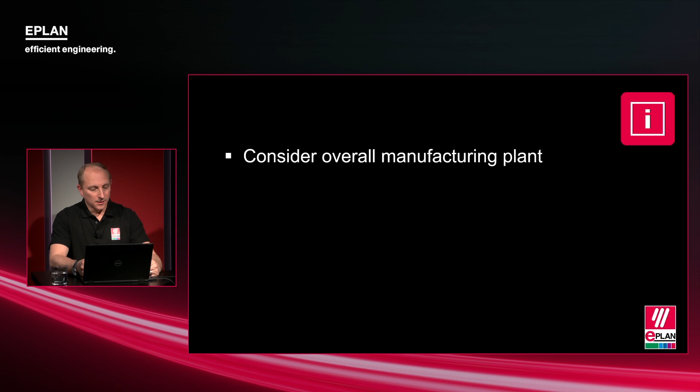So for them, standardization is about simplifying communication and collaboration with their subcontractors. This is really a key element for them to assure that all machines and systems they are investing in utilize the same type of technology, for example. This simplifies things for every field service engineer managing the same type of HMIs or PLC systems in their plant.

If you have completely different systems for every machine, that would be an enormous challenge for the field service engineers to manage. Think about a failure on one part of the line using a specific PLC system, and in the next hour you are jumping to the beginning of the line, and this part has a completely different PLC system. This creates a lot of challenges for them. So to harmonize and simplify this is really a key element.

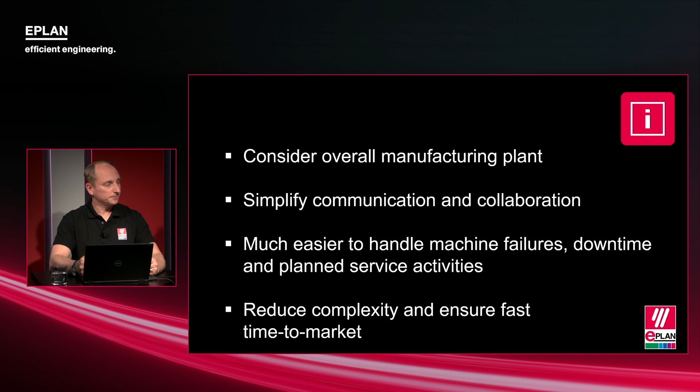And to have field service engineers that know all the systems really requires a lot of training. For a new engineer coming into that plant, it would also take an enormous time to onboard. So at the end of the day, from the operator perspective, it's about reducing the complexity within the plant to maintain and handle their systems altogether.

On the other side, from the subcontractor's point of view, they have a slightly different view, because they are producing a machine, for example, in a line which they are not going to maintain for the next 10 or 20 years. So for them it's about efficiency, utilizing standardization to ensure that they are able to reuse their engineering from machine to machine or plant to plant.

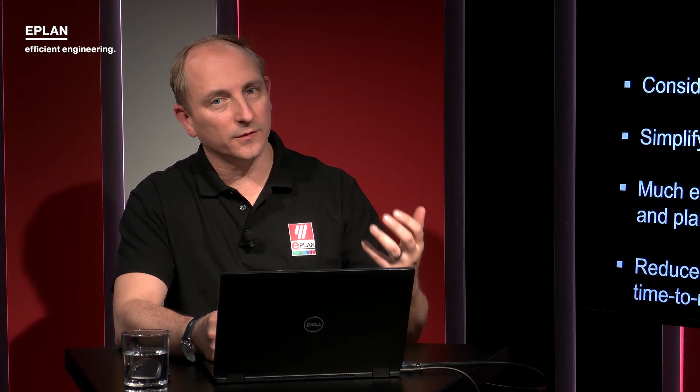This also ensures that they are competitive in the market, and as they may have multiple engineers in their firm, that they ensure the same quality in every project, regardless of who is involved. That is what standardization does for them, as two examples. Okay.

When we have a look at this list of benefits, that sounds quite reasonable, yeah? So there is a lot of added value in standardization: it makes things easier, simplifies communication, collaboration, etc. So that is quite obvious from the operator point of view, or as you mentioned, also from engineering departments.

But the experience was made that when we talk to customers, at customer meetings on fairs and customer events, and also not only customers but prospects, when you make the first steps with EPLAN and we address this topic of standardization, the first initial feedback is always: that's not possible for us because we have individual solutions for our customers, we have variants in our machines, we have modules, options, and every machine is quite special, is individual. So, is this true?

And that's of course true, Thomas. I also experienced the same meeting companies in most countries actually. They think very commonly from, let's say, a mechanical perspective. And from a mechanical perspective, yes, the machine or plant or line, whatever they are manufacturing, might be physically quite different, so to speak.

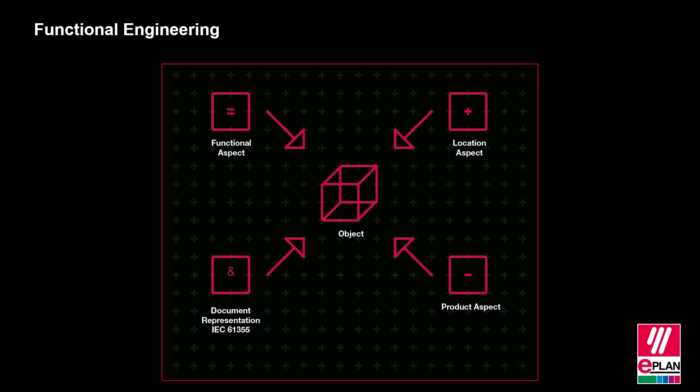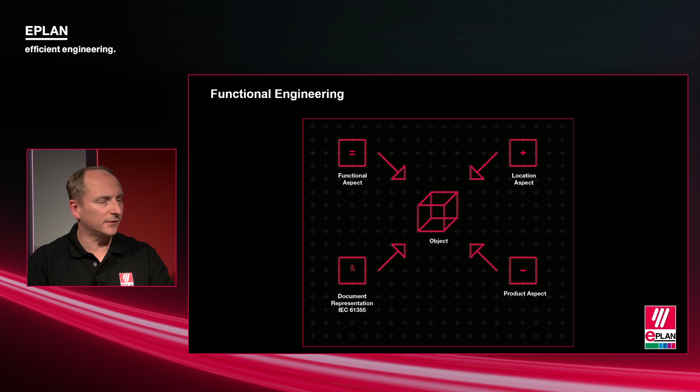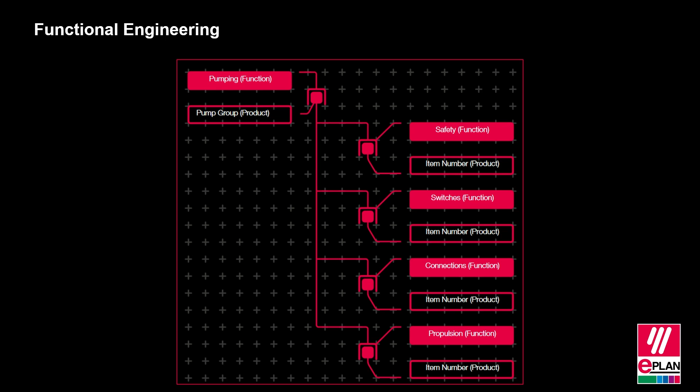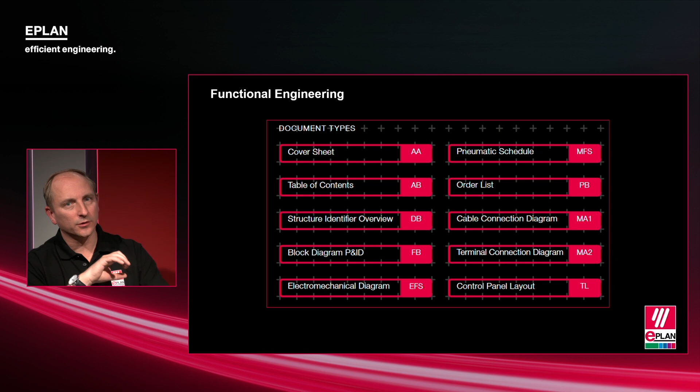Let me show you another aspect important when talking about documentation and reusability. What's important about the naming convention is also cross-trade, because when you think about a project, you need not only electrical controls design, but also pneumatic design, for example, controlling certain cylinders based on air. Based on that documentation, you need to think about the cross-trade within the same project.

Traditionally, in old standards, this was not really considered, because it was not necessarily supported by the engineering systems available. However, with IEC 81346, we think about all the cross-trades that you need to have and document within the same system.

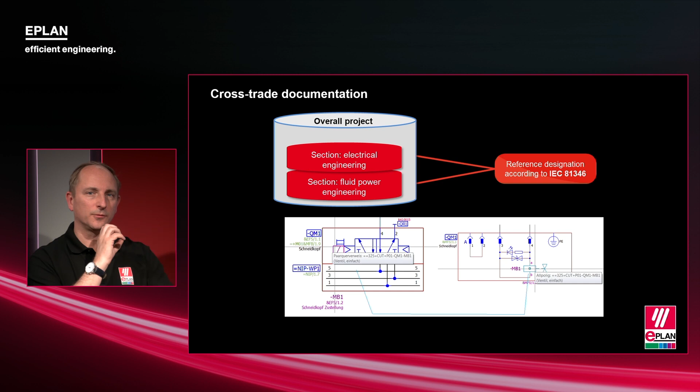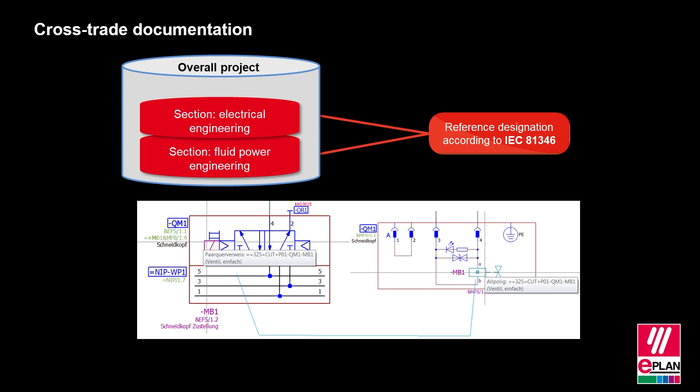Based on the Eplan platform, we have multiple different engineering disciplines we utilize. Taking the example of fluid design using Eplan Fluid, and electrical controls design using Eplan Electric P8, here's an idea of how the project encapsulates both engineering standards using IEC 81346 to also have the same naming convention. This is getting more and more important, and that's one additional reason why more engineers and companies are changing from the traditional production-oriented documentation to a more functional-oriented documentation.

Maybe just to give you a little insight into the software, so you can get a feeling of how it looks inside the Eplan platform. Let's switch over to the Eplan platform and have a look.

On the left side, you can see one of the industry samples provided from Eplan. We see the project, and here we see the first structure. This is the IEC 61355, which, as I mentioned, is related to the documentation structures. Here, for example, I can very easily find the documentation related to electrical controls design. This was the EFS, for example.

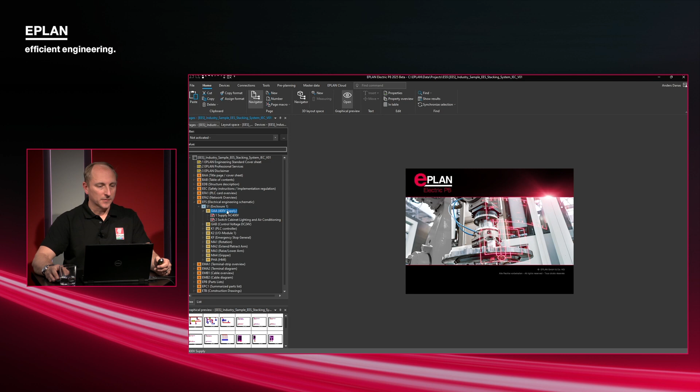Based on the structure below, we can see the plus, which was the location. In this case, this is located for enclosure 1. We also see the function, related to a 400-volt supply. Based on this, I can open the page and directly find all related components related to that power supply. So this is a simple way of seeing how you're replicating both the IEC 61355 for documentation structuring, and the functional aspect of the documentation related to IEC 81346.

So you introduced these, from my point of view, or maybe in the market, and you said customers are more and more switching to these new standards that support this idea of functional engineering. But when we look back, there is a traditional way to create documentation, and there is a reason why. So is this argumentation for production-oriented documentation still valid?

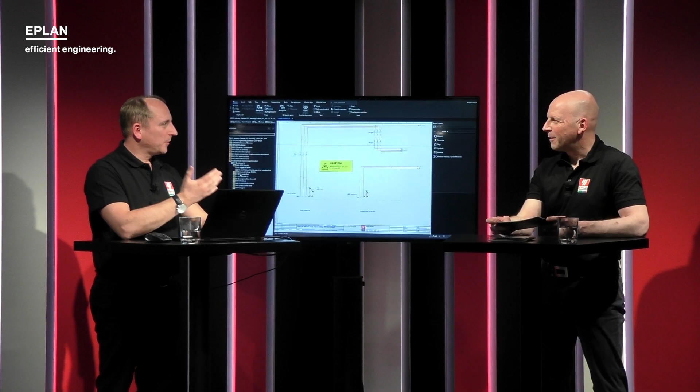It's an interesting aspect, Thomas, because we are faced with this question time and time again. Of course the legacy aspect is always an important factor, but the legacy is also built on systems that did not really support functional design.

Just to take an example, in a typical hardware design or production design aspect, you had to go through a lot of different papers to find the same information related to a function. On the other side, today when you do it in functional design, this is not necessary at all.

Because in Eplan, you have the ability to create all the data you need to collect all the information for manufacturing. If that is related to wiring or any other aspects in the panel, this can be collected out of all the functions.

That means the engineers can now support both the requirement on the manufacturing floor as well as the end customer, the operator, who requires documentation that is much easier to rely on when it comes to repairs and maintenance.

So that is somehow a change in the view of this electrical documentation, to have all the information in that functional structure in the schematics, and then derive it to prepare it for the target group. So to extract a wiring list, to extract a bill of material, and have all these different views, but one source for this information, and this source is easy to engineer, so to say.

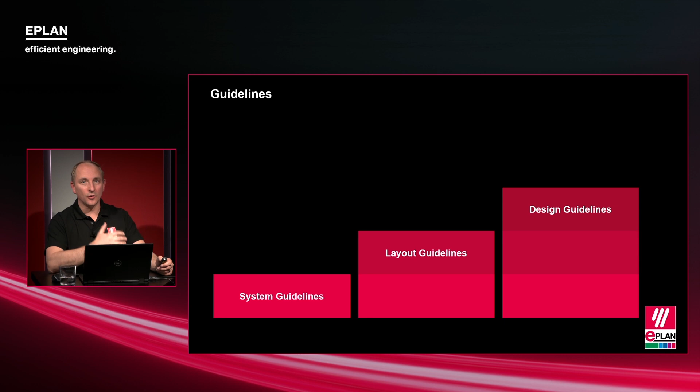As I mentioned earlier, when you think about the operator, they want to be able to store spare parts in their facility. Instead of storing parts from all manufacturers available on earth, they want to structure and standardize to certain brands or specific systems that are well known by the field engineers.

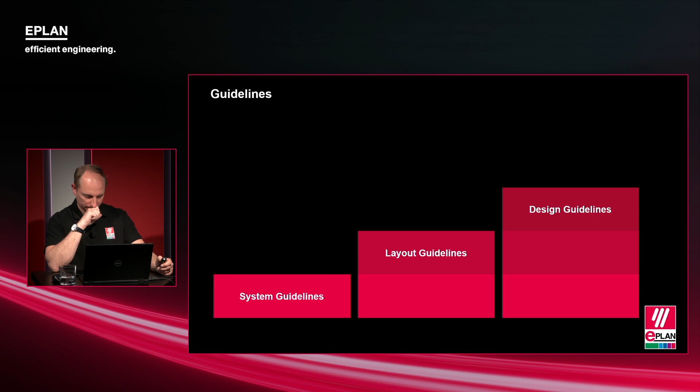So this is normally where we talk about these 3 levels of guidelines that operators work with towards their subcontractors. A takeaway here is that the idea behind it is scalable, so the first steps are maybe basic, but they can already have an effect.

Just thinking about system guidelines, to standardize on a system so that you get documentation based on Eplan, for example. You have these Eplan files coming from all the different sub-suppliers. That already has a great effect.

And then, of course, the operator can develop and go more and more into detail, getting more holistic definitions of how the engineering has to be done.

I think it's also a good idea to really get into collaboration and work together with these sub-suppliers. Even from the machine builder or supplier point of view, it could be interesting to address these ideas towards their order party, to think about how we can synchronize and have a common understanding, rather than finding out too late that they did not follow a standard in that project.

Yeah, so that I think has added value for both parties. And what I took away is that it's important to share the guidelines, standards, data, and so forth.

So now let's go more to the feature level or function level. What are the offerings from our portfolio to support this collaboration and sharing of data?

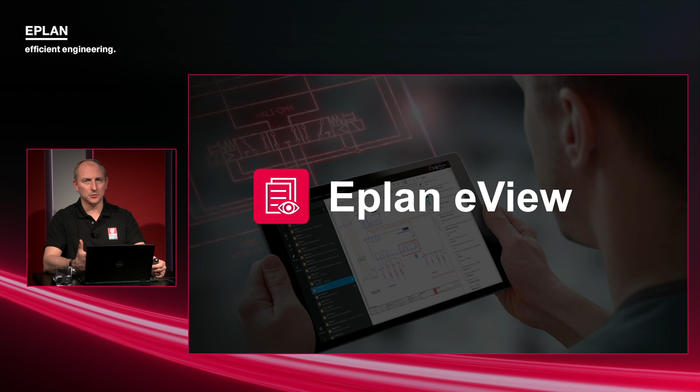The Eplan eView is the perfect tool to go in, have a look into the documentation, and also handle redlining. So where they identify mistakes in the documentation, they can redline it, mark it up, and communicate back to the engineering itself.

Another aspect, as I mentioned earlier, is where the operator provides a clear standard for their subcontractors to work with specific component manufacturers. They can even predefine them and provide it through the eStock environment. Based on this, there is an approved parts list that every subcontractor can work with, so they don't have to reinvent the wheel by utilizing new parts into the documentation.

Okay, is it possible to have a short look at the Eplan Cloud so that we get an idea?

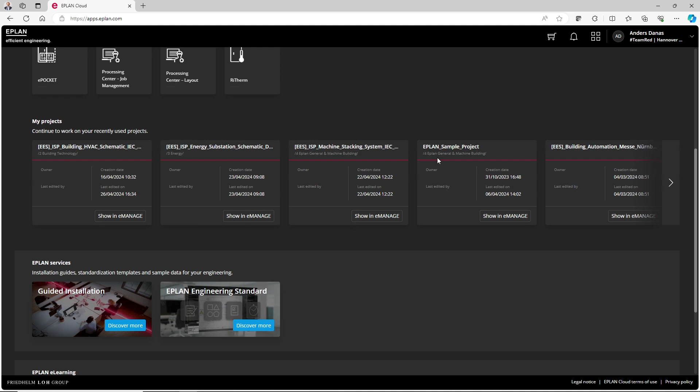Of course. So what we are looking at here is the cloud environment, and as I mentioned, we see the various apps in our environment. We also see my current projects that I'm working with, and various guidelines and e-learnings provided by ePlan in this environment.

Let's start with eManage and open it to have a look at the projects currently in my environment. As you can see, we have a tab defining the internal project, but also the external project. As I mentioned earlier, you can define different rights to specific locations to divide it between different subcontractors that you want to provide certain data with.

When we look at the different projects, we can go in and see the project details, like when it was created. We can download this to start working with the documentation. We also see here an example of a PDF, which is of course also possible to share.

Directly from here, I can also open my eView, which accesses the project online without any licensing, going directly into the project documentation. As we can see on the left side, we see the same structuring referring to the same standards that I talked about earlier.

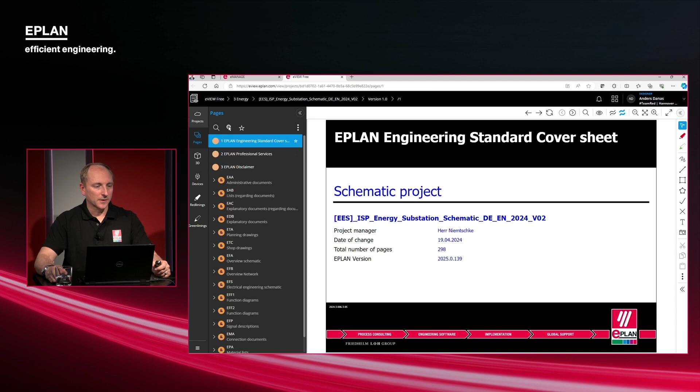We see the view of pages at the moment, but I can also see, for example, if it's a cabinet designed in a 3D environment with our ePlan Pro Panel. You can also look from a device-oriented perspective, and I can have a look at the redlinings that have been done in the project.

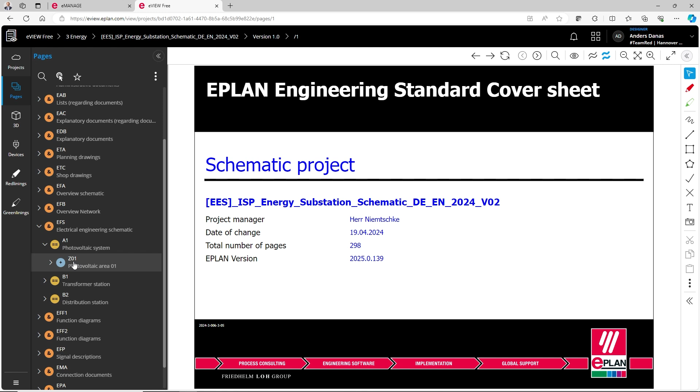Just to take an example, we were earlier in the EFS area for documentation, which is electrical engineering schematic. We can also see different types of functions and locations, and I can directly go into my documentation. You can also see on the right side, this is where I can do my redlining.

Based on the same, I can also mark the area that is going to be flagged and communicated as a change, and write the necessary information. I incorporate this, and then I can communicate it back to the engineering company or subcontractor that is actually doing this.

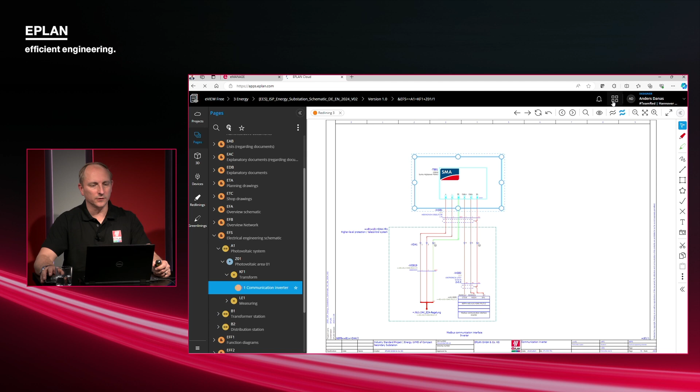So I have a direct link between the subcontractor and the operator working together simultaneously based on the data that is worked with. So this also shows a very quick view on the eView, but also maybe just jump back to also talking about the eStock, for example, as I mentioned earlier. And this is also an application directly here in the cloud environment. And this is where I can see, for example, it's directly opening up my parts on the left side.

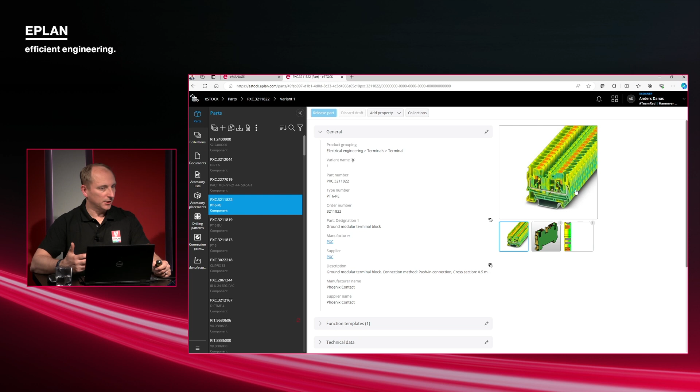We see the general information, but I can also see the graphical macro that is available from a 3D perspective or a 2D perspective, and also a product picture. And this is also where I can see all the necessary technical information that I'm utilizing. And of course, this is also available for the engineer.

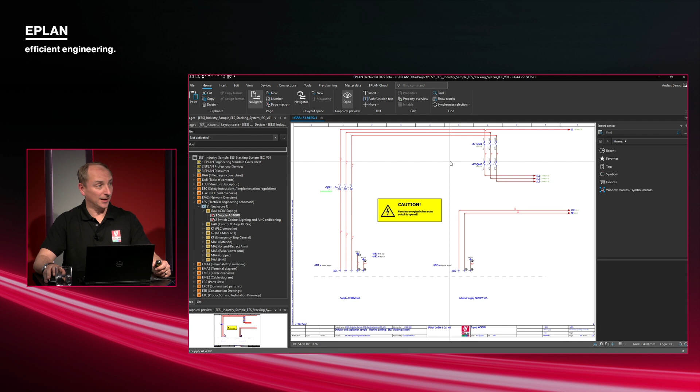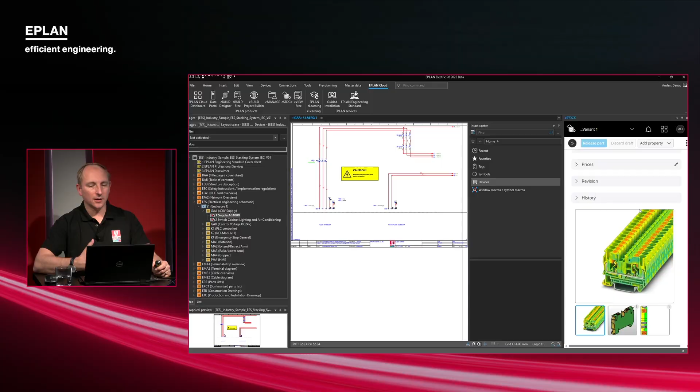So if I open Eplan again, I of course also find the Eplan Cloud here. And based on the Eplan Cloud, I can also find the eStock environment, where it's now opening up also all the same parts. So I can go and have a look. And based on the parts, I can also see the same part here to start working also with this terminal, for example. So as an operator, the different levels and different solutions in the cloud can support, again, the collaboration together with the subcontractor and simplify communication and the management of the guidelines in between.

So Anders, that was really a presentation and introduction of a very powerful, let's call it an engineering environment. We talked about these aspects, the benefits of standardization. We talked about the different aspects. So we have these design topics, the system topic. Then also these structuring topics coming from these standards. We talked about parts. Libraries are standardized so that you have a common basis to work together. And now we finally saw these services that support the communication between different departments.

And now just the question that is popping up in my mind is when customers say, yes, we want to do, we say, okay, they can start, right? Even maybe better today than tomorrow. But there is, of course, a question coming up: how is ePlan supporting in that topic of standardization and starting to structure engineering? Maybe you can just summarize it in short words.

Yes, of course, Thomas. I would say ePlan has multiple ways to support our customers in their journey. And I would like to mention a few of them here today. So I would like to start to promote our EPLAN Engineering Standard. This is a fantastic opportunity to start with ePlan, not from scratch, but with really a lot of data, not only from best practices from different types of industries, but also from multiple different standards, including different types of typical drawing reports from the different types of industries, basic projects, and so on.

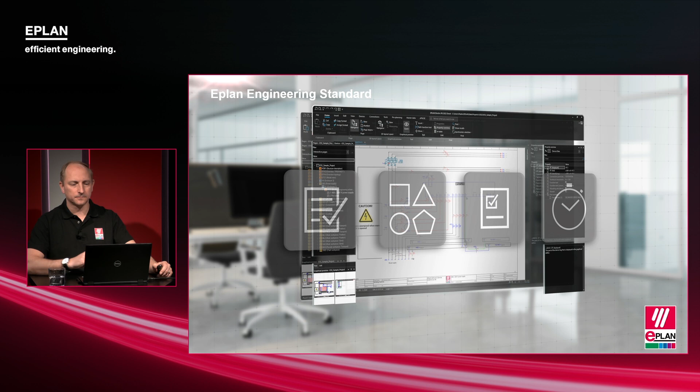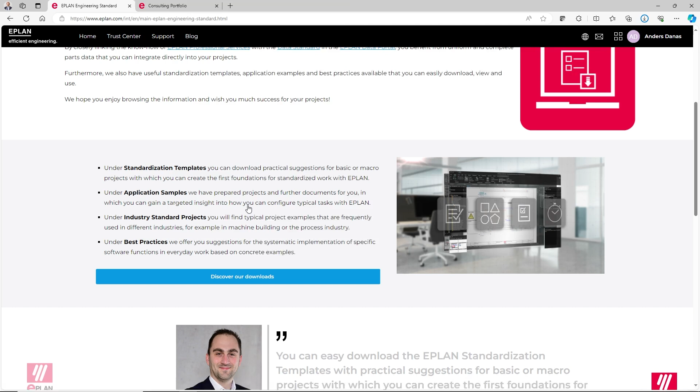Let me show you live where you find it, because you need to go to eplan.com. So as you can see now on the screen, this is where we were actually before when we looked in our cloud apps for eManage and eView and eStock and so on. And on the same location, you will scroll down and you will also find our EPLAN Engineering Standard. So as we go in here to discover more, we will find more information, what it is all about, but also you find our download page as well.

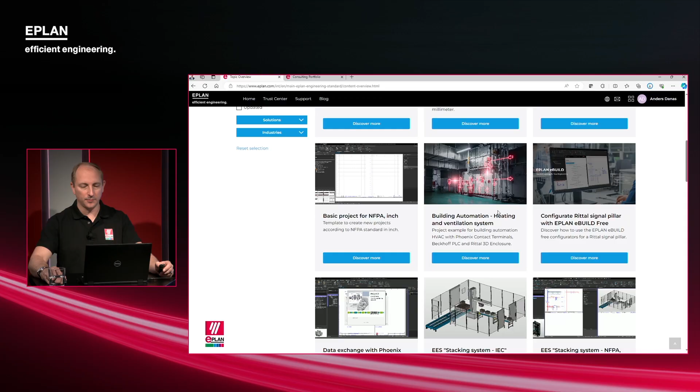Here we'll be able to find also on the left side how you can filter on different best practices or industry standard projects, for example, but also what type of norms you're looking for, the IEC, for example, or NFPA. And also here you will find every aspect from, as I said, basic projects from building automation, for example, or if you are in the machine building environment, you of course also find the same type of projects here. You find typical information from various suppliers like Phoenix Contact, Rockwell and Siemens and so on.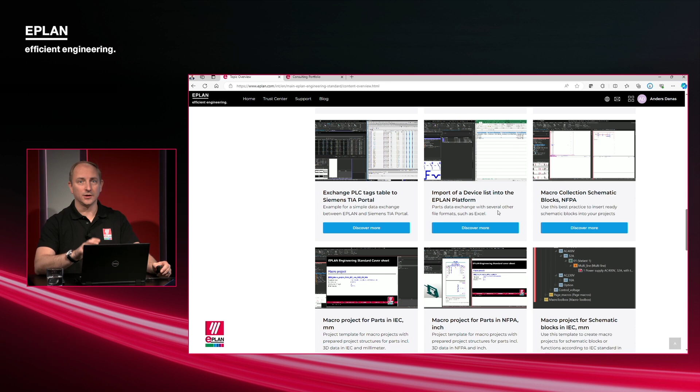So here you find really a lot of information that helps you to get started, where you have a perfect standard with the highest quality that you can expect, also referring to standards like IEC 81346, as I mentioned earlier in the standardization phase. And here you can really find perfect reference projects and best practice projects from your industry and just download and start using. So this is one way, Thomas, that I would like to promote.

Another way would be also, if you think from the operator perspective, as I mentioned earlier, it's important to ensure that your subcontractors are really aligned on your expectations, how you want the projects to be designed, how you want them to be delivered, how you want them to qualify the quality that you are delivering, for example.

And this is something that the operator is commonly doing also by creating what we call e-learning. So they are providing trainings to the subcontractor basically. And this is also something that EPLAN provides to create for various operators that want to educate, share and coach their subcontractors to do the design in their preferred way. And this is also something that you find not only for the specific operator, but you find e-learnings also on the eplan.com environment.

So if I start the e-learning environment, this is also where you can filter on the different types of e-learnings. Of course, also here you find the update trainings that we provide, but also all the other specific information for Fluid, for example, or how to handle reports or how to handle multiple terminals. So the e-learning environment is something that we share with all our customers to get deeper knowledge in the EPLAN environment and the EPLAN platform. But also we help operators to specifically share how they want their design to look and to be delivered and to be trained to their subcontractors.